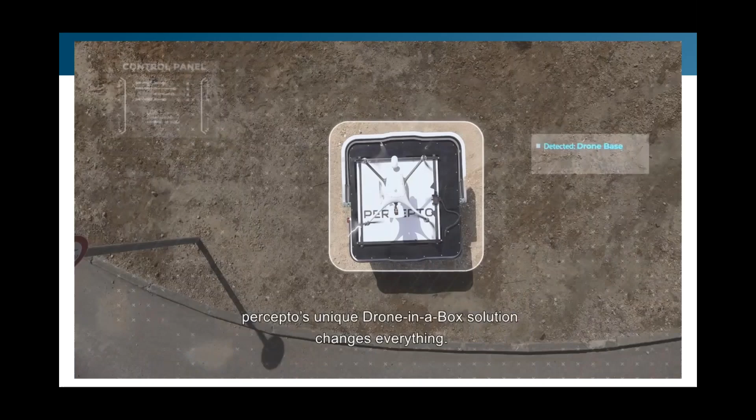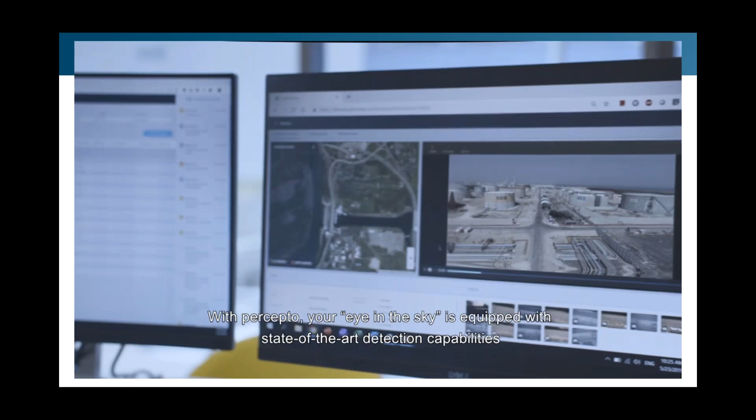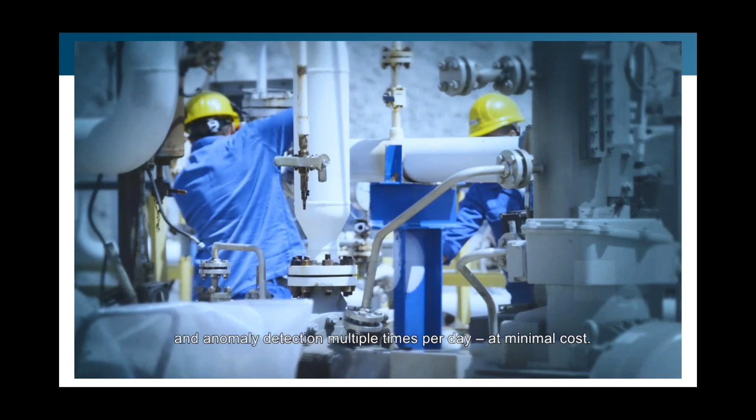In our hyper-connected world, blindness is no longer an option. Being unaware of a dangerous malfunction, a security breach, or an emerging trend can lead to financial damage, shutdowns, and the loss of lives. That's where Percepto comes into the picture, with fully autonomous, intelligent, multi-mission drones. If you think all drone solutions are the same, think again. Percepto's unique drone-in-a-box solution changes everything. Place the box, define your missions, and you're good to go. With Percepto, your eye in the sky is equipped with state-of-the-art detection capabilities combined with powerful data processing solutions right out of the box, bringing you actionable insights across a range of tough industrial settings and enabling you to perform remote infrastructure inspection and anomaly detection multiple times per day at minimal cost. Perform round-the-clock monitoring of high-risk facilities and stop unauthorized people and vehicles with computer vision-based detection and tracking. Equipped with thermal imaging optics, Percepto drones work day and night, eliminating security blind spots without creating an unnecessary burden on your ops teams. And get accurate daily output and stockpile assessments, as well as 3D modeling and forecasting. In an emergency event, Percepto is first on the scene, providing situational awareness that can save lives without endangering them. Percepto turns teams into super teams, makes impossible tasks routine, and enables operations to be carried out safer, quicker, and more cost-effectively. Our mission is to make the world's most intelligent drone solutions as simple as possible for a safer, more productive world. We're not just talking it, we're flying it. Through countless missions, from Florida to South Korea, from Chile to Singapore, we make our customers' facilities more secure and more efficient. In a world that depends on a new level of awareness, the sun never sets on Percepto autonomous drones. Autonomous, intelligent, simple. Percepto.

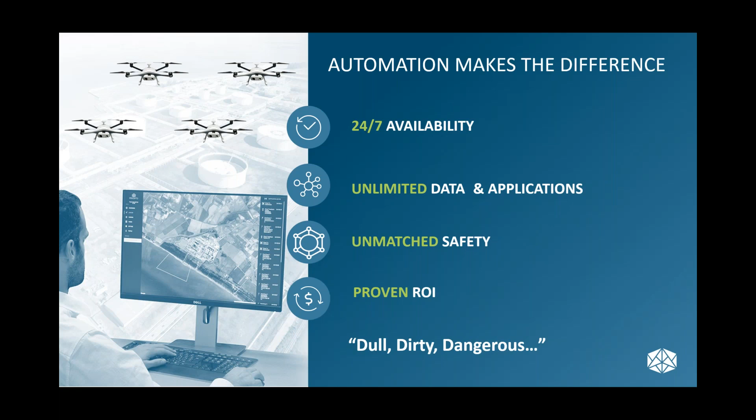We say that we are a multi-mission drone in a box, because whether you're interested in maintenance, security, or pile estimation, the system can provide a solution for you.

The idea is that the system is not just physically part of the site, it is integrated into your site architecture. It becomes a team member or an asset that's readily available and can provide different inputs or outputs to different stakeholders within your site.

For example, every morning the system can go out to do a scheduled mission for perimeter security check, where the relevant stakeholder is your security team. Then an hour later, the system can do a site mapping mission that provides inputs for your site manager for shift handover in the morning.

As part of that site mapping, they're also doing creek water temperature analysis. The relevant stakeholder there is your environmental compliance officer, for his compliance audit trail.

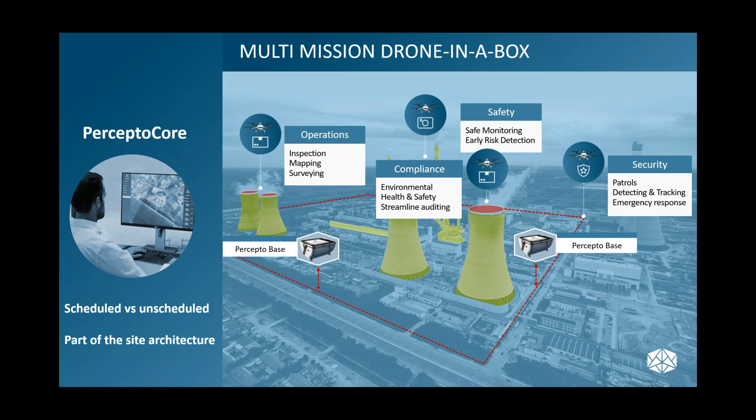But there's also manual on-demand unscheduled missions, where you can't get hold of your dozer driver somewhere, and instead of going into the ute and driving for 20 minutes, you send a drone out manually to tell you what's going on - and you can see your mate having a smoke behind the tree. So that's a bit in general about the system.

There's three main elements to our system. The drone, of course, which for some reason we called Sparrow, even though it really should be called WALL-E - if you have kids and know the movie, it looks like him. The drone itself is about 10 kg. The wedge tails, we've met them in the air - they haven't yet decided it's worth their while to tackle us. So it's a pretty big drone.

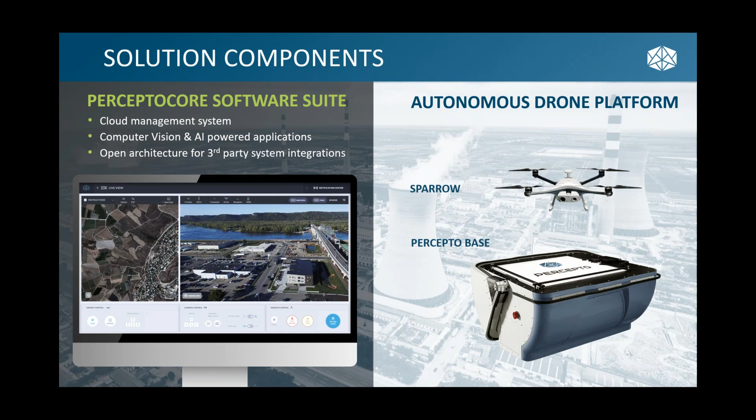We have the base station itself, which is there to provide shelter, charging, and communication. And the main element in our system is actually the PerceptoCore - it's the software, a cloud-based system we call the CMS, and we'll talk more about that shortly.

Just to understand, the base station is around 350 kg, so not checking luggage on a Jetstar flight, but definitely something you can put in the back of a big ute. It's intended to be not a mobile system, but a fixed system, although we have applications on a trailer that are mobile by nature, and that's something that can be explored depending on your site and scenario.

The base station is robust enough. We just tested it in Florida for hurricanes, so up to 145 miles per hour winds for survivability. So that's good for our cyclones as well.

The idea is charging the battery, sheltering the drone, and providing a communication port to offload the raw data that's coming out of the drone.

The drone itself, probably the main interesting thing is the sensors. We always fly with two sensors, the 4K day camera and the very sensitive radiometric thermal. So we always fly with a thermal and a 4K camera, which we use day or night. It doesn't matter, you use both.

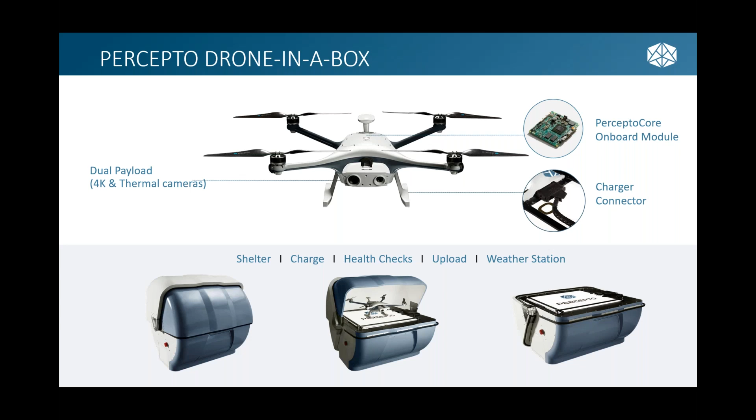Now, we talked about the drone, we talked about the box, but don't let those pieces of hardware confuse you. Percepto is first and foremost a software company.

The only reason we have a drone in the box is because to be able to perform the software applications that we want to perform, to extract the right insights for you guys, the only way to do that is to have a tool that's robust enough, ruggedized enough, and can handle the dust and the wind and the temperatures and the snow wherever it is that you guys operate. So that's why we have the drone in the box.

We actually started out as a software company, but reverted to also making the drone because there was no other system that can do the data acquisition that we needed in the challenging environments that a lot of our customers are working in.

So the idea is not for you guys to have a drone that flies there and you watching the video and learning things from watching the video. That's not the intent at all. We want to make sure that you're being efficient with your time, and we want to help you with that.

So the idea is that we extract insights and we generate reports, and we send reports just as PDFs on an email to the different stakeholders.

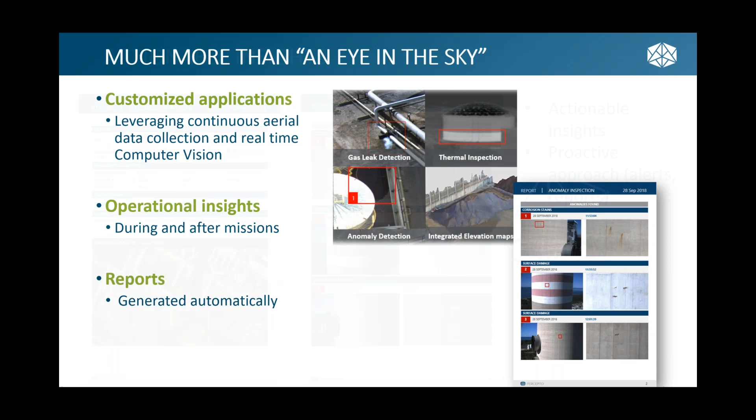Those reports, by the way, are generated automatically. Some of the reports literally come out of the box, but some of them could be unique reports that you guys might have in a unique site or scenario that's of interest to you. So that can be looked at as well.

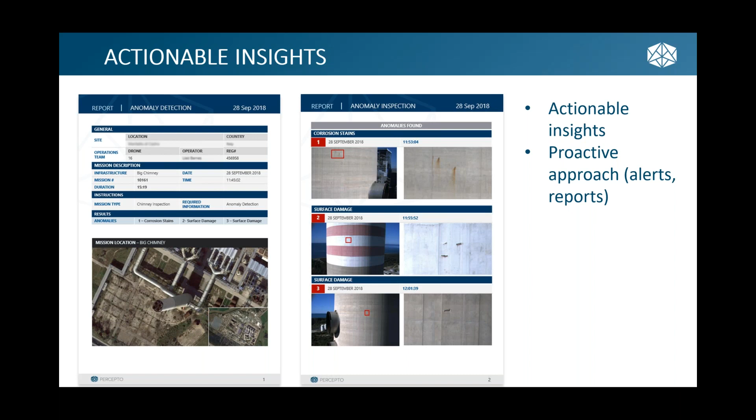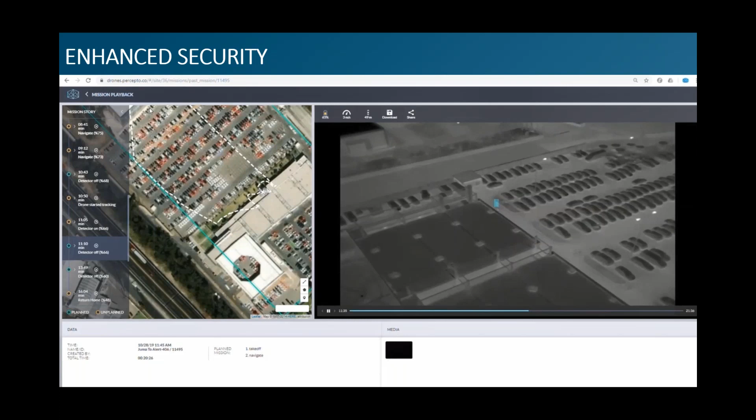All right, so I'll skip the security use case because it's less important. I will just say one small thing around that. While most of the analysis we do is post-mission, offline, security is done on the edge in real time because of the nature of the application, and that includes real-time human detection, tracking.

That includes real-time vehicle detection tracking. Somebody asked about wildlife. You can teach the neural network what is a kangaroo, for example, and you can do that. It's not an existing application, but it's in one of our Air Force deployments. They are looking at wildlife management as a potential application, for example.

Another example of an application is a site map. You can see here on the left an example of your just Google Maps of a random site somewhere, but there's a lot of value in getting your own quote unquote Google Maps satellite image that's updated every day or every few days, depending on the size of your site, and that allows you to see in higher resolution really what's happening on site today. You can see the contractors with their vehicles and team doing the work that they're doing.

How are they progressing? You can use that for shift handover and other applications that might be relevant, but you have a detailed, high-resolution snapshot of a map of your site every day or every other day or every week, or whatever utilization you want to use for that application.

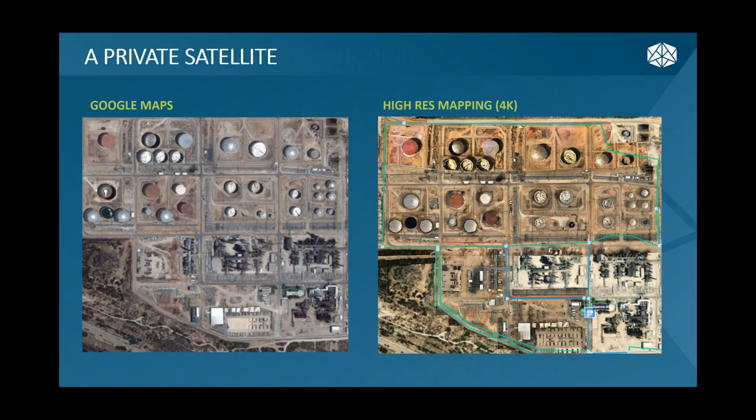Another interesting application is just progression of construction processes. By the way, this also applies for progression of piles in the mining space. So you can apply machine vision and smart analytics to show you what has changed, what was removed, what was added, what percentage of the project has been achieved. You can compare actual versus plan and see how you are against your forecast of progression, for example.

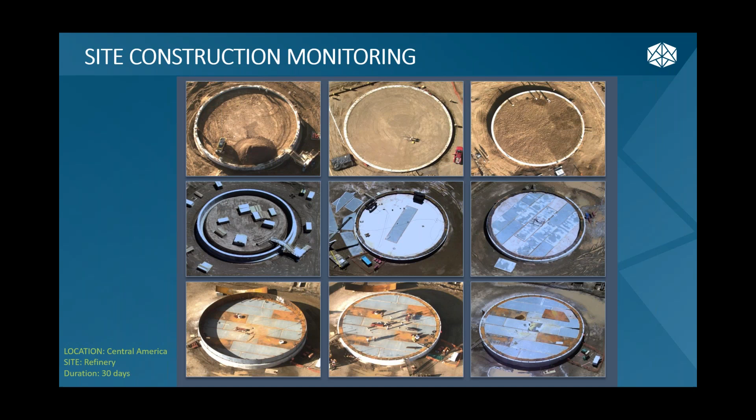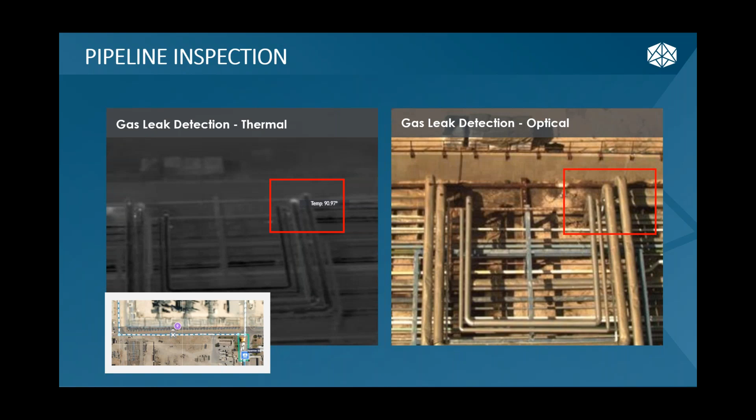Here's another example of a pipeline leak. The team defined a certain threshold temperature, above which they're interested because something is wrong. It's a very sensitive radiometric thermal system, so we're able to achieve that. You can see the bundle of pipelines here. It's very time consuming for a human to go with a thermal handheld device and try to capture exact temperature across all of this bundle of pipelines. With a drone, it's of course much easier.

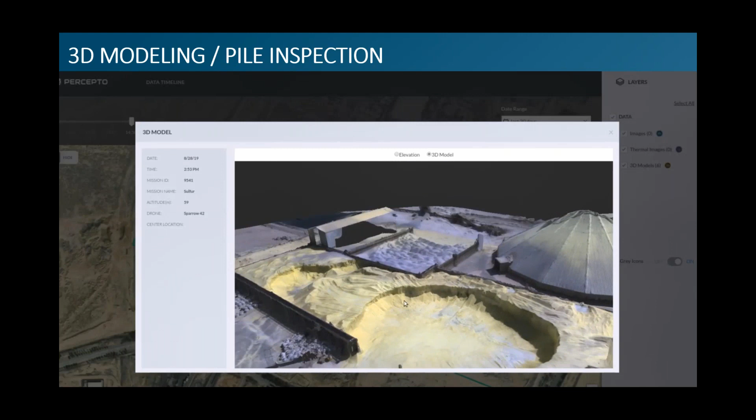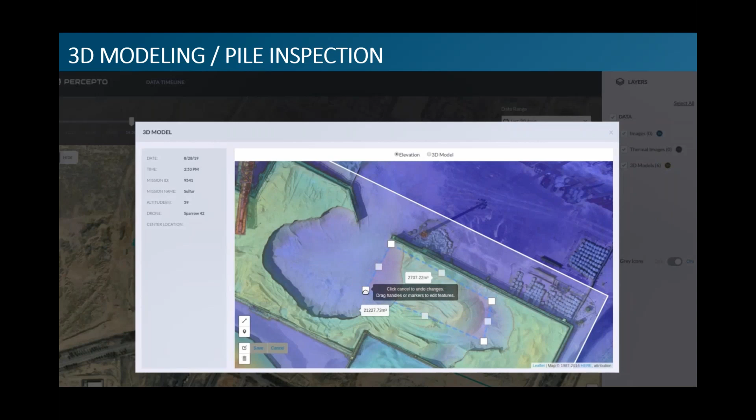Another example of something similar at a different site. This is a nice example of 3D modeling. By the way, we're not inventing the wheel — some of our back-end applications include the likes of DroneDeploy, for example. So once we do the 3D modeling mission, these elevation maps and 3D models are available for you on our system post-mission. So let's say 1.5 hours after landing, you can go ahead and do pile estimation or view the 3D model that was generated.

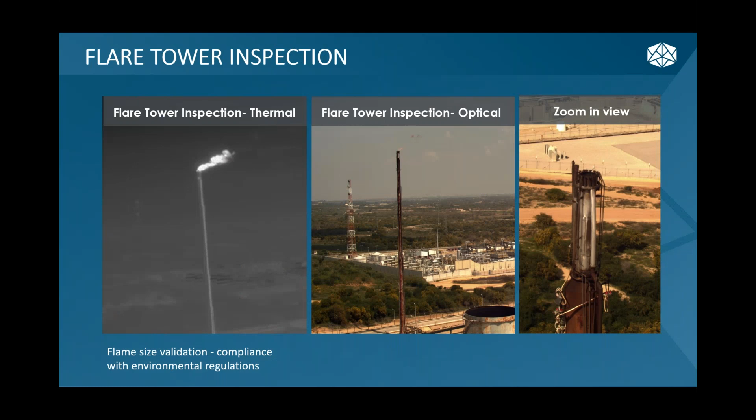I think that's less important. I mentioned some examples on environmental compliance — here's a report from, I think, an Italian site around environmental compliance.

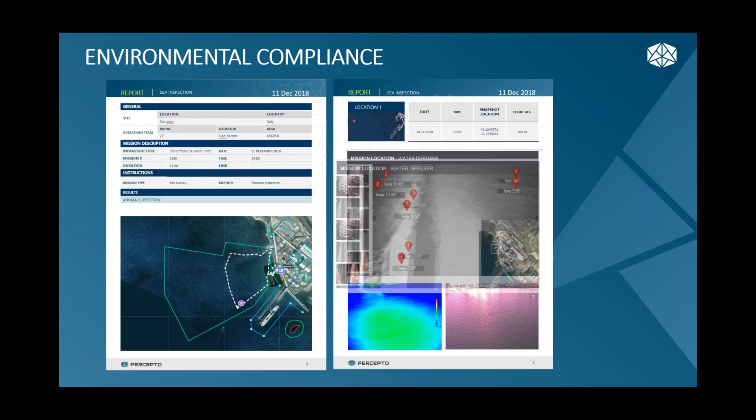And that's it for examples. The idea with this system is to allow your team to be more efficient, to be safer, to be able to concentrate not on capturing the data, but on actioning the analyzed data. And that's where, again, the core strength of Percepto is the ability to autonomously and smartly extract insight from any visual or thermal data across your site.

Now, just conscious of time, I will touch on the regulatory status of things. So, of course, as we are flying all over the world, we're flying in Chile, Mexico, USA, Canada, Portugal, Spain, Italy, Israel, South Korea, Singapore, and now in Australia. Wherever we fly, we of course have to adhere to the local regulatory authority, like CASA.

It's important to say that wherever we are deployed, we have a very strong regulatory team, and we're able to achieve the highest levels of approvals. Where BVLOS, beyond visual line of sight, exists, we get BVLOS. Where there's no such thing as BVLOS, as in the case of the FAA, then we get the highest waivers. In the FAA, we also have a special program running — I can't go into it, but we should have a press release on that in the next few weeks. So we are as advanced as the FAA allows you to be in that space.